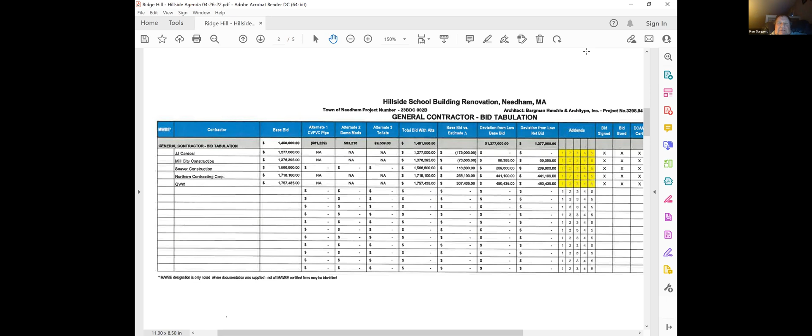As Hank said, I'll let Walter give you a little input with their experience on it. And then we'd like to take a vote to award the contract to Cardosi so we can get the letter out and the contract going. So once we get the approval at town meeting, we can move forward with getting them started middle of May or so. So Walter, if you want to jump in and give us your experience with Cardosi.

I spoke with Jay Cardosi 2 days ago about his bid, and he was very comfortable with the price they put together. I worked with Cardosi in the past, maybe 3 years ago - we did a project in Grafton for the public TV studio they have there. It was about an $800,000 project, so a little smaller than this, but this is in the wheelhouse of the kind of work these guys do. They were very responsive during the course of the project. Change orders were about 6% of the cost of the project, but most of that was owner driven.

The electrical sub that they're using is Galway Electrical in Needham. I think you guys are familiar with their work, and Galway is DCAM certified. And the Tel Data consultant they're using is American Teleconnect, out of Rhode Island. Jay Cardosi works with this Tel Data company on a regular basis, so they're very familiar with their work. American Teleconnect is also DCAM certified, so they're a good outfit.

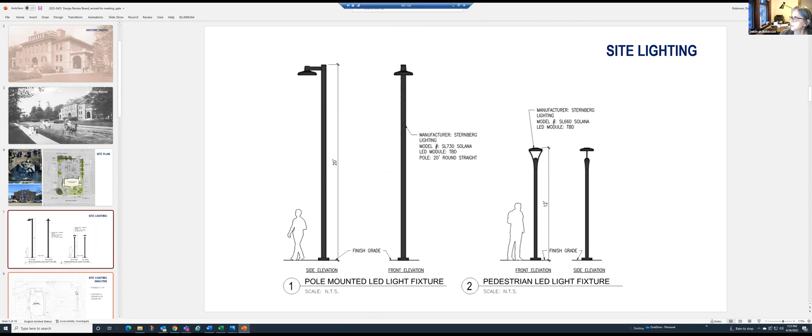We showed the selected light fixtures and had a hot-off-the-presses analysis of the foot candle that those light fixtures in those locations would bring to the parking area and the site, showing that we do meet the requirement for an average of one foot candle throughout the site, and that it's shielding and directing the light only into the property and not out into any of the residential areas. It's pretty much zero along the property line.

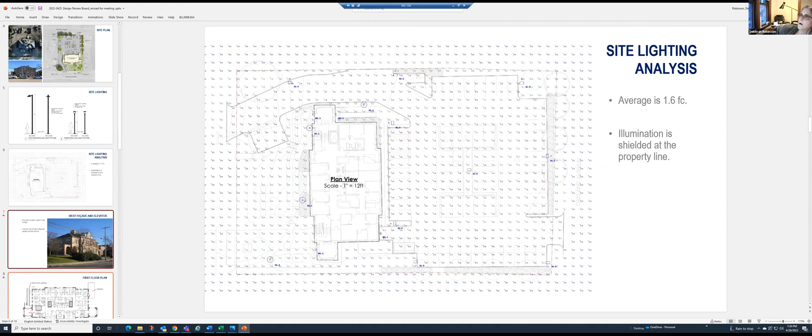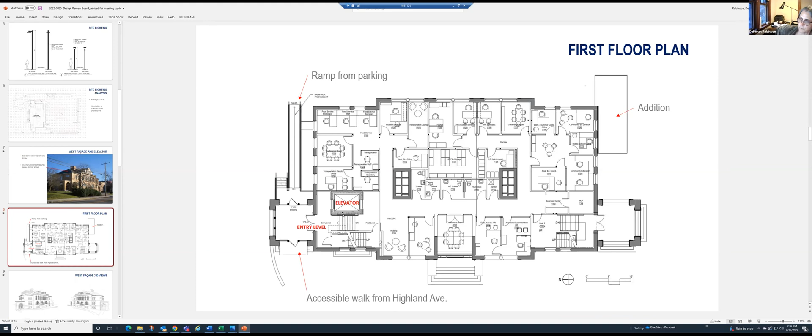Just to show the design review board, the existing addition and the view from the west will affect the dormer that has to go in here for the elevator overrun, and explained that the elevator really has just one place it can be inside the building that would work to get you into the building and up to the first floor most efficiently.

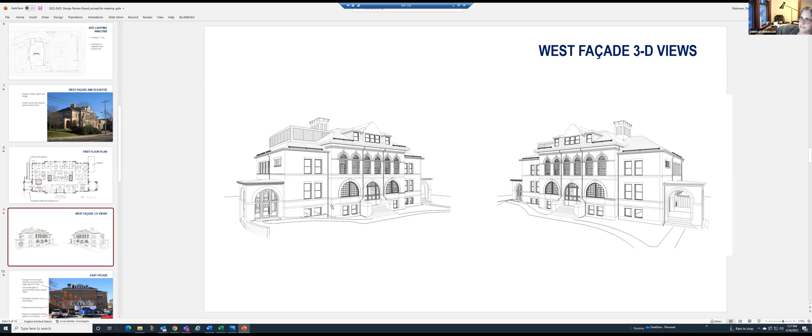So explaining that, and then showing the two views of how that will look from the exterior. These views, when we present this on boards at town meeting, we're refining a little more and bringing it down. This view is actually not really for a person at street level—it's raised about 12 feet—so we're adjusting these views to be down more at eye level from the street.

Then to show them at the back of the building some of the changes there will be, such as removing the brick panels, replacing windows. We're going to be looking at the exact location of some of these existing rain leaders that were retrofit to the building at some point, looking to maybe do something that puts them at the sides rather than this location that's just a little bit unsightly.

The location, again, that you've seen before of the new portico that will be enclosed and the ramp from the parking that will come up to that. And we have a more developed design for how that infill will look, which was included in some detailed drawings.

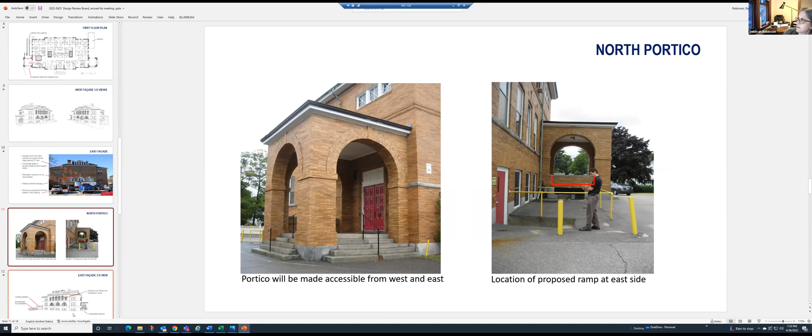Again, the back of the building—this view showing the ramp up into the enclosed north portico, a ramp and a set of stairs, and then this landscaped area at grade that will still allow the windows to have light into them for the offices at the lower level.

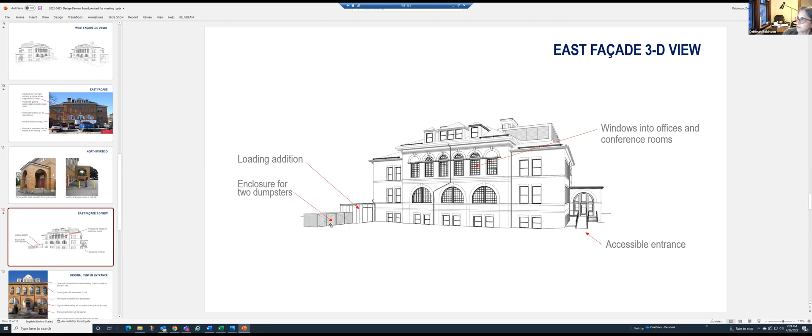Our addition for the delivery right here, and then we're still working on this, but the idea of the trash enclosure with double doors that will allow for side-by-side dumpsters. We're looking at maybe making the dumpster enclosure and the addition look a little more unified, more as one piece rather than two separate pieces. And we'll design the trash enclosure as an architectural piece as opposed to more of a landscape piece.

The front of the building, again, pointing out to the committee some of the things we're doing: enclosing the original entry space as a conference room, removing the parking. Again, we're going to be looking at maybe moving these leaders more over to the side of that facade, replacing the copper gutters and the slate, and then no plan to replace the clock face.

So this is one item that actually the design review board people mentioned. We hadn't really looked at this too much beyond the decision to not put the clock back up there. The Historical Society has that clock face.

I think we've talked about this, about the fact that there's no need to have another working clock at Needham Center, where you have the town hall clock, and the cost of making this operational would be considerable.

So the design review board suggestion, which is a good one, would be to do something to make it look less like something that's been covered over, which it is. So we're going to look at maybe recessing a panel, putting something in the panel, or a dark, two-tone color, or some image, whether it's an N for Needham or something that could go in this clock face. It was good that they brought that up.

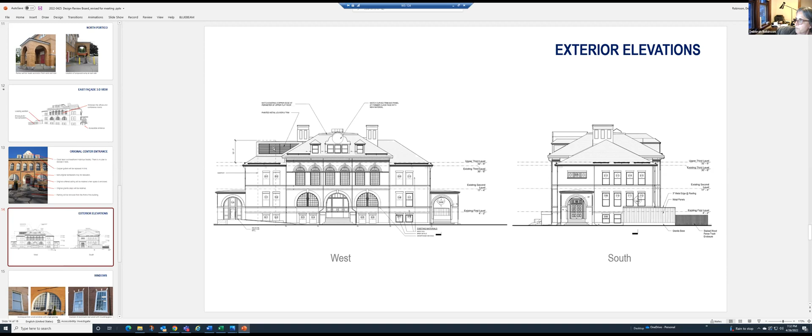So that, and they also commented on the dormer, and we'll look at subtle ways to either make it a little more modulated with more pronounced verticals, or else eliminating the verticals and make something that's more modern and horizontal. But there seems to be an understanding that these moves have to be made, and that they're being done in an appropriate way that doesn't detract from the building.

We showed them also the concept of the type of window we're using, the existing, and then these are the existing, and then this is something similar, and then the metal clad wood with insulating glass and applied muntin approach.

A few of the color schemes to show our intent. This is a photograph of the existing brick, and then the idea for the cladding of the addition, some kind of standing seam metal panel that we can have painted in any color we'd like. So we're looking to find a color within the range of the brick that works with the existing coloration of the building.

And then the last image to show an example of the idea for the color of the dormer. This is a piece of the existing slate from the building that I think I found in the attic. And then these two color swatches are actually the same color, it's just a matter of how the photograph took.

So this is from a website, this peppercorn color from Sherwin-Williams. And then when I put the sample and photographed it together with the slate, to show the idea that we're trying to blend the dormer in with the slate so that it is as integral with that color-wise as it can be.

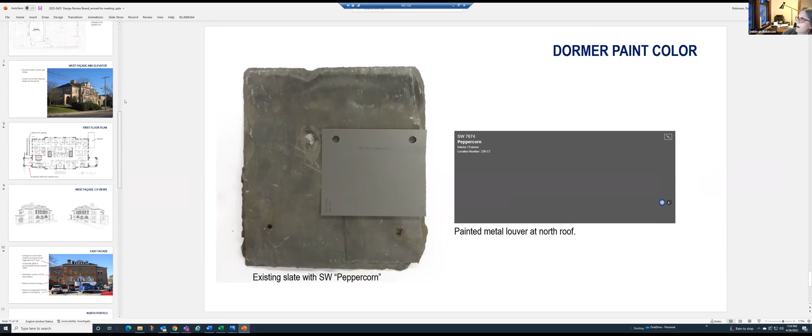So we had this PowerPoint, which is more of an overview to present to the design review board, and also submitted a full set of drawings similar to what's going to the design review board - the same set going to the zoning board of appeals and the planning board, with a full set of civil drawings, landscape drawings, and architectural exterior elevations and floor plans for reference.

I could put those up if anybody's interested, but I think the site plan pretty much illustrates the site issues that are out there.

Great, great, thank you Deborah. And any questions from the committee?

Deborah, I had one question. As you were talking about the clock face, the cover, shall we say, would the town seal work on that space? I think where this is up high, the elements of the town seal would just be too small.

So we've had an idea, let me just put up the 3D view. This is a little busy looking right now, but approaching the entry porticos, both from the east and the west, we have these glass openings and glass doors, and in both cases have been putting the seal - sorry, the graphic that I think is the school department logo - in the glass above the door, kind of as a marker of the entry. That also could go up here, or just an N.

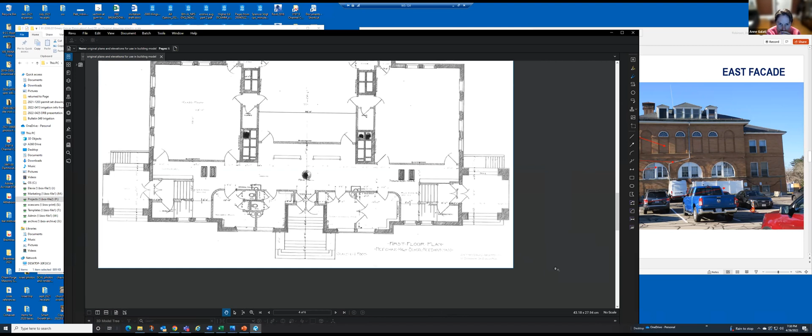So if there's no intention of putting a clock face - that's an interesting point. Wait a second, if you bear with me for one second, I can show you the original drawing. There was no clock in the original elevation.

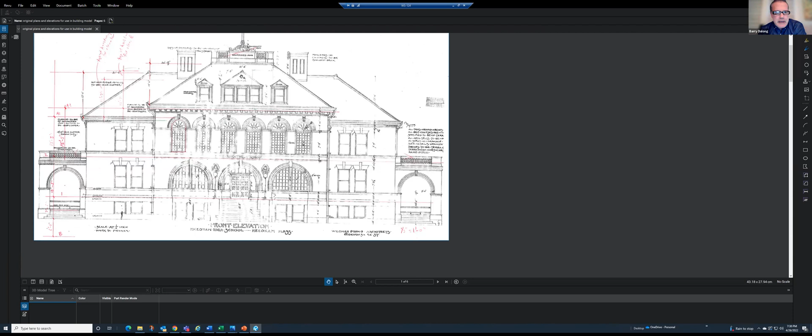So the question is, if there's a similar dormer with a hip slate roof and no more clock face going on up there on the backside, maybe we could consider that as an option. Obviously if we put something up there, I'm going to have to maintain it 10 years down the road, which would be difficult - I'd have to get a lift and whatever it is that's put up there. But if we just turn it into another pitched roof like the other two dormers, maybe that's an idea.

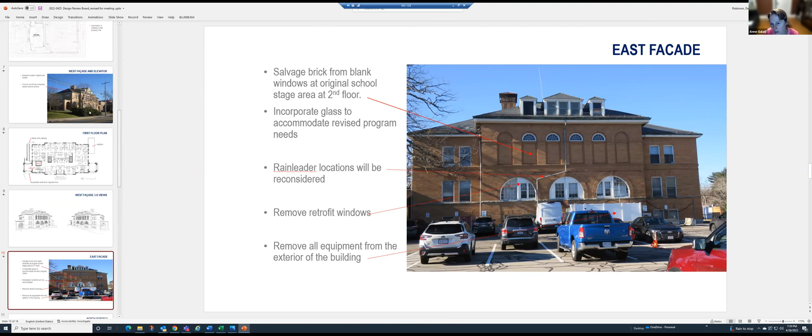Thank you, Anne. I like Barry's suggestion, but as an alternative, I wonder if there's a possibility of allowing the school department, the superintendent, to decide or make a suggestion about what he might like on the face of the building. It occurred to me that at Needham High School, the kids were involved in selecting the logo for the department, and there might be interest from the school department to select some kind of small design for that space, either created by the kids or otherwise.

Oh yeah, absolutely - we can start by putting some ideas on drawings for discussion. You could have a competition to design the image for the building. I can see that being unifying for the school department and something of interest. But in the absence of that, I do like Barry's idea quite a bit, if that wasn't something the school department would want.

So this is the one I was thinking of - I understand it to be the logo of the Needham Public Schools, just the tower with the N in it. The kids designed that logo for the space over the door, something on the glass to mark the entry. Is this the Needham High School seal? I think this would just get lost too high up.

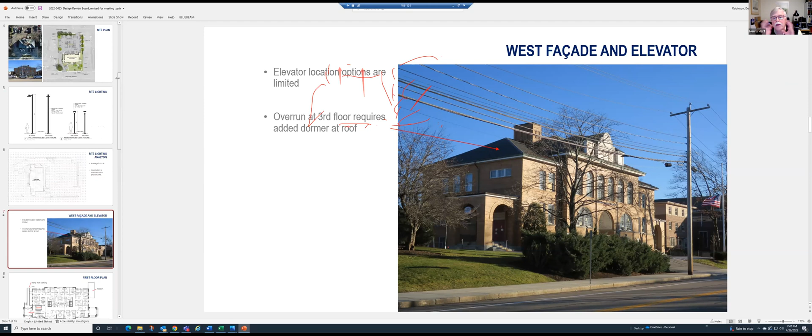So if it were punched through, it would kind of look like a clock because the glazing would be darker during the day, and it might bring additional light into that space.

We can make a drawing of that at a larger scale and give it to Ann and Dan, and let everybody get some ideas going for that. Great, some terrific ideas. Any other questions or comments for this part of the meeting?

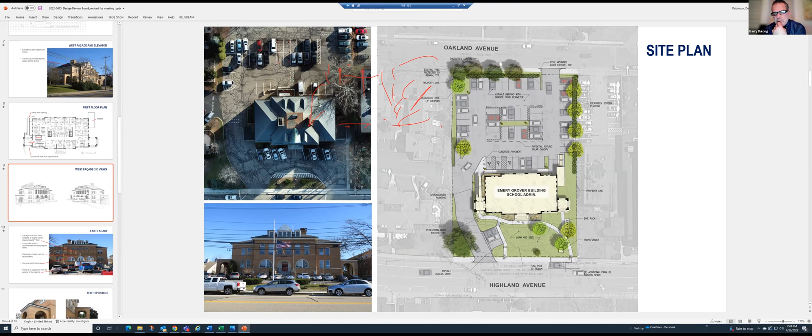I got just one more. Deborah, the 3D renditions you showed us were just kind of plain. Are we going to put color to that and make it a true pedestrian rendition once we present this? These drawings?

We're going to put some color to that, some trees, kind of a scale pedestrian type of visibility, like what it would actually look like given some other schemes. We're not just going to present this in a stark white kind of looking way.

For next week's town meeting, we're going to present the black and white views as we've been developing our 3D model, and it has been done in color. It's kind of hard to get the brick color to look like a good match, and that can be distracting when the colors aren't quite right. For purposes of just showing the few moves we're making on the building, it's nice to see a pedestrian perspective. This works.

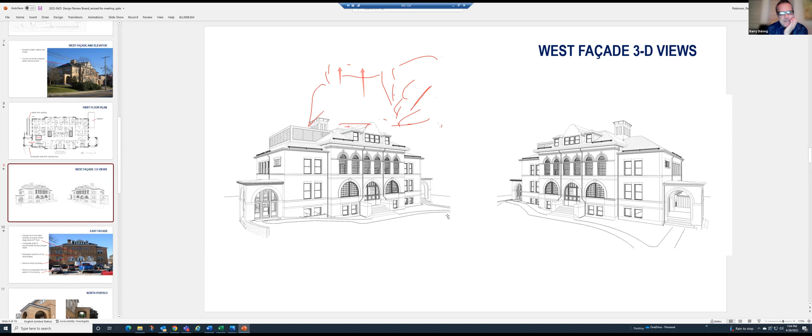Moving forward, for the duration of the project, if there's certainly a need to have a rendering showing what the completed building would look like, we can take time to decide whether we do it ourselves or send it to our renderer to add more landscape, trees, and people in addition to the building. We can have a nice rendering of one of these views.

Thank you. Great. Okay, if there are no other questions or comments, I think at this point, Hank, we can wrap this topic up and move on to the invoice or invoices.

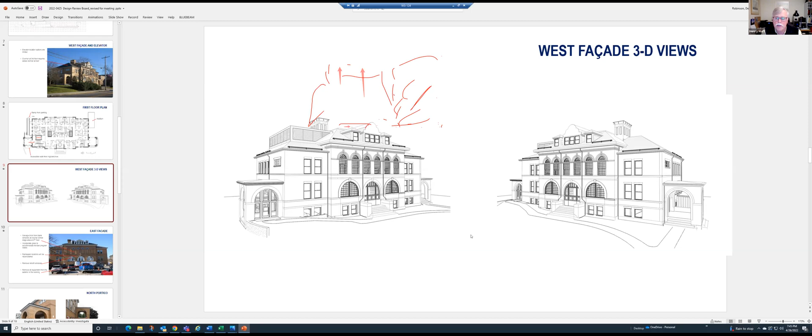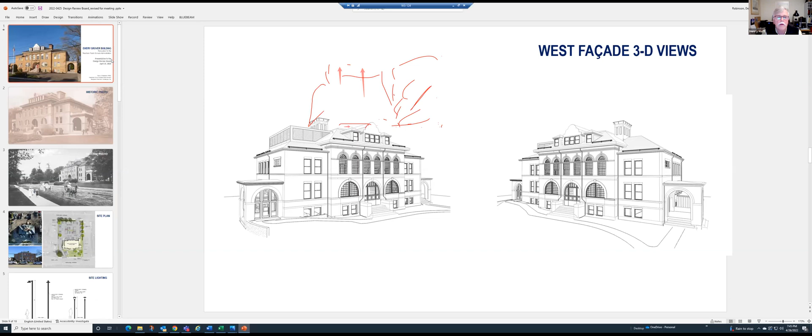I should mention we had a meeting with Select Board on the 13th, and they urged us to move forward with the accelerated schedule. They saw great advantage to coming back to fall town meeting with bids in hand if additional funding is necessary. As you recall, during the last meeting, design development cost estimate came in about $2 million higher than anticipated from the feasibility stage work. In our original schedule, we wouldn't be coming back with bids in hand until mid-December.

So with that, Ken and I are going to work with BH+A and their team to try to expedite reviews with the school department, building maintenance department, and others as needed, so we can get the bids out on the street by the 1st of September. That's our goal. We'll come back at the next meeting with a series of milestones along the way where we'll want to talk about interior design, FF&E, mechanical systems, energy management, and so on, so that they can get the approvals needed to move expeditiously in the design process.